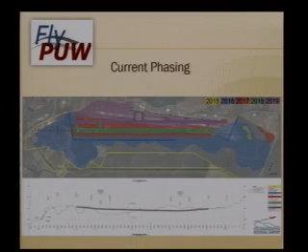The construction, we started that, and a lot of the pictures have to do with what is going on with that particular endeavor. So to kind of show what's going on, 2015, you can see the yellow line that goes around—that's the power line, is this piece here. And then we're really talking about this work right here is really what you're going to see. 2016 shows that there's going to be a lot more work to the east side, and that just did not—there's some work that happened over here, but not all the way down.

In 2017, we're really looking at trying to get the remainder of this work done, and then this work will be bid. They're both about the similar size.

I'm hoping this works and that we actually got sound, but this is a typical day when they started on the project, and it kind of shows what happens with scrapers. What you're going to see before I click the video on is dozers pushing scrapers to try to get earthwork up, because the clay soils underneath are heavy. It's heavy, it's hard to push, and it's amazing the amount of horsepower that goes into this.

At this point, there were about 40 pieces of equipment on 60 acres, flying around. Those dump trucks are doing about 65 miles an hour. It's just amazing, it looks like a giant pig pen flying down the landscape. I sat out through this summer several different times, and it looked like a NASCAR race with a bunch of great big earth scrapers. These tires were taller than I am standing up.

These guys, and Tony's not exaggerating, they're clipping along at a fast, in my view, scary pace. It's a good thing I'm not driving one of those things, I tell you.

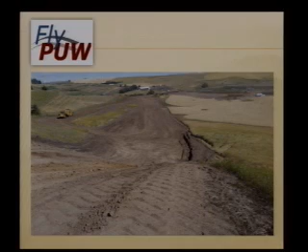Ironically, it could be donated as a road, but the FAA doesn't allow you to accept donated things for restricted purposes, so we are purchasing it, and we're using it as a road so they don't inadvertently destroy Highway 270. But the groundbreaking, if anybody was familiar with the groundbreaking on this project, was actually right here.

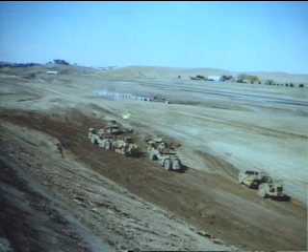This gives an idea of the cut and the angle of the cut when you look at how they did this piece, and then how much equipment is moving, and then you can see the box culvert down here at the end, and we'll show some pretty neat pictures.

We basically had to pipe Airport Creek, which runs through the airport currently. It comes in the east side and goes out the west side, and that's got to be put in a box. That's a pretty neat endeavor where they had to go down to bedrock, and there's some really cool pictures of how they put that into place.

This is just them working, but it's a fun story. Anytime you do a big earthwork project, especially around here, where you're going to do 60, 70, 80, 90 feet of fill, things are going to compact. They're going to settle with time.

Strata, which is local, is the geotechnical engineering company on this project. They had to put $30,000 worth of sensors in the ground, so you'd know how many feet or inches of compaction you have over time, and how much deflection you have, because you're raising the earthwork up as you go.

So they put these sensors in the ground, and then we had to figure out, okay, if a scraper goes by, or one of those dump trucks going 65 miles an hour hits one of those sensors, we're going to have to dig them all up and spend another $30,000. So how do you prevent that?

One thing we figured out was scraper operators won't hit the national standard flags, which delineate where those instruments are. You can see the flag way down here—they're looking at it from a haul road, but you can see it from quite a ways away, so they stayed away from it.

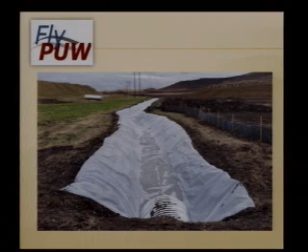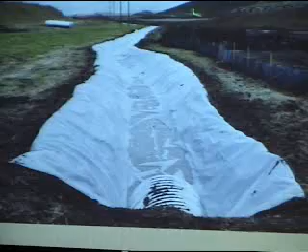This is Airport Creek, and we had to build a separate alignment for it. They plasticized it up and built a separate alignment to temporarily reroute the creek so they could start putting culvert in. You can see equipment staged up at the top, starting to do lifts.

They went through here with a cat that had basically a big claw on the back of it to rake up how hard the clay was, so they could get it moved and get a scraper to use it. You can see it's kind of rubbleized—it looks like a bunch of rock, but it's not rock, it's just really, really hard clay.

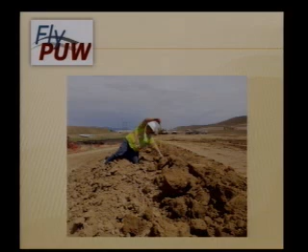They do everything in lifts because you have to compact it. One of the things that's really difficult about the soil around the airport and in the Palouse in general is there's a lot of water in it, and water does not percolate down through the soil—it just sits there. To get compaction to where the engineer says it has to be, you lay the earthwork out in a big thin sheet, about 4 inches at a time, and then pack it down. They do that over and over again.

If you're doing 4 inches at a time over 20 acres, it takes a while to move that much earthwork. If you've been out there recently and seen how tall some of that is, that's 4 inches at a time for that many acres. It's pretty amazing.

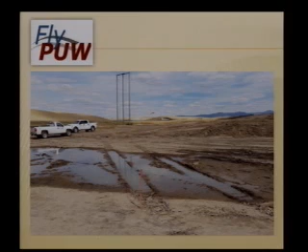This is the water—they opened up the topsoil, got down to clay, and all of a sudden we had a spring. It happened immediately; there's standing water anywhere you get close to bedrock. Because of how the Palouse was formed, with the Lake Missoula floods and those kinds of things, you get basalt, and if you go to the channeled scablands it looks like a big canyon that filled in with silt. So in some places bedrock is 6 inches away, and in others it could be 600 feet. Water tends to spring up in odd locations from time to time, and we found a lot of that with this project.

So how do you get rid of the water? You've got to get a certain amount out. This is a farm tractor with a disc, and they're disking that soil so it can get compacted, so the scrapers can run over it and it'll actually dry out enough to get the compaction. They do this for each 4-inch lift.

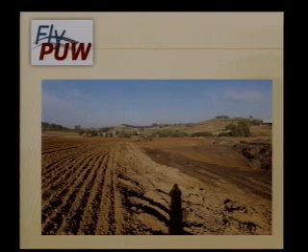This is the scraper. You can see, kind of like what you saw in the video, they've got a big belly dump in here, and the earthwork is spilling out of it. The amount of torque they have to use to push one of those is just unreal. And when you use a lot of torque and push a lot of weight, things like that happen. So this one blew a tire.

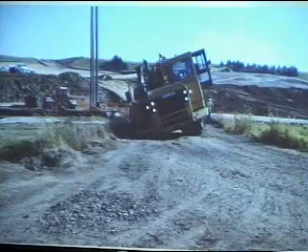Like Bill said, the tire is taller than you are, and it costs $12,500 a piece. They blew three in a week, the first week, trying to move earth. It's just an amazing thing to watch. The maintenance crews were running 12-hour days, and then mechanics worked the other 12 hours just to make sure everything's up and moving for the next day.

This is the box culvert. They came two to a truck, and so far we've placed 365 sections. There were 182 trucks that came from Salt Lake City with box culvert on them. So we saw a lot coming through, in and out, to get that placed.

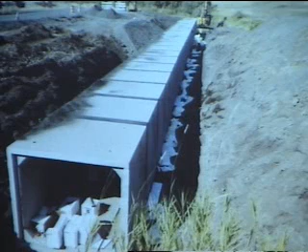And here's the box going in. They started it up, and it's basically like a fit-together toy, as they keep sliding pieces in and then seal them up. And the tolerances—well, there's a picture of the tolerances, but they're extremely close.

You've got to set it just right, because if it's backwards, the water doesn't flow the right way. And if it's tipped too far, then you have too much coming out, and you end up eroding everything downstream. So there's a lot of engineering that went into just designing this and getting it to where you could put water through it.

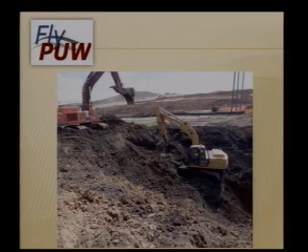So they're digging down to get the box culvert in. They've got to get to bedrock, because water sits here and then you've got bedrock. If you design the box culvert where it should go and don't fill that up with rock, you've got water hitting bedrock, going underneath it, and eroding your box. So the box starts to fall, and over time you end up in a big problem.

So they had to go dig, and this kind of shows how far they had to dig. You've got one excavator digging down and dropping, and then another excavator picking up from there and dropping. These excavator buckets are I think 35 or 40 feet, so they're going down quite a ways. And again, water—here they're hitting bedrock, and you start seeing the groundwater seep into the project.

But they're loading trucks—you can see that's a big dump truck. I can't remember how many cubic yards those hold, but the tires are taller than I am. You can see how much material is going into there.

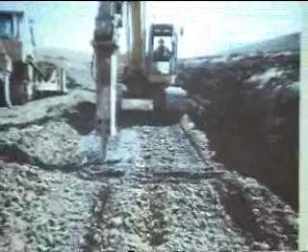This is drilling, and they drilled because they needed to blast. We got to the point where the bedrock got really close, so you've got this piece of bedrock that sits up here and then drops off. They had to get rid of it, so they drilled—I don't remember how many holes, but it was thousands—and set charges over two separate days to blast that out so they could get the rock out.

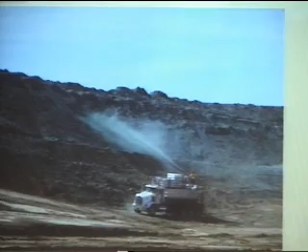This is hydroseeding. They had to do hydroseeding quite a lot, because you've got to keep the material from eroding and ending up in the creek. Otherwise you have an ecological nightmare because you've stopped up everything downstream in the creek from not controlling the runoff. So there's a lot—it's millions of gallons of hydroseed that they put in, I'm pretty sure. It wasn't a little bit, and a lot of hydroseeding had to take place over time.

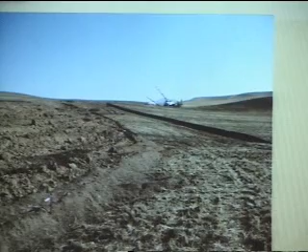This is Michael's—this is a power line going up. So we took the existing power line and moved it. So one going up, and here's one—this gives you an idea. Paul, correct me if I'm wrong, but I believe these are 35-foot or 40-foot power poles in here. So this is 40 feet.

This is an island of earth all by itself—everything else is removed. The existing power line was here, and the contractor had to work around that until we could switch the power lines over, and there was a lot of work to get that done. That power line sat on its own out on that island until two weeks ago, when it was finally taken down once they were able to switch the alignments.

Before you go on, you might want to mention how the distance, because where that power line is set up, and that 30 feet, they went quite a distance that had to be dug out. I have no idea how many feet to the west or east that went, but it was quite a distance. They had to be guy-wired away.

So it was, I think, 250 feet outside of this when they got to the base, and they just built it up like that, and it sat on its own. It's just one big earth island that they just kept digging around.

This shows just from a long ways away, they're still farming. Here's the disc, and here's the tractor, and they're working this entire thing back and forth with the disc, trying to dry it out. This was August time frame.

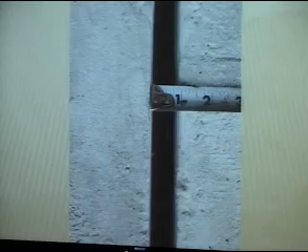We start seeing water show up in the box itself, and we get into October, which everybody that I've talked to that's been here with any length of time says is the wettest on record that anybody's ever seen, with how many rain days we actually had. So that got to be problematic.

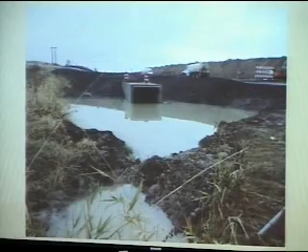It's hard to do work and get to bedrock when you've got to pump all the water out. You can't just pump the water out and pump it into the stream. You've got to pump it into a truck and filter it out. It's not a simple just move the water over here and set it back in the channel. It doesn't work that way.

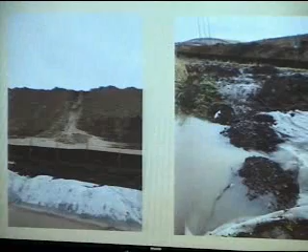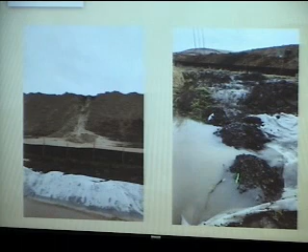This is runoff, this is from October. So you've got erosion fencing and that temporary creek settlement they've got in here, and it's already starting to silt in because there's so much water, it has nowhere to go. The ground is completely saturated, it has to go somewhere.

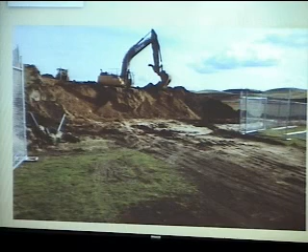This is a building for Washington State University to relocate a building that was underneath the power line. Nobody wants to work underneath the transmission line, and Avista doesn't want you working underneath it either. So we had to order a temporary office building, temporary meaning a couple of years probably, for those people to move into a different office facility, with the permanent facility to be removed in the spring. That was a large coordination between the airport, Avista, and Washington State University.

This is Airport Creek from the east going around Airport Road, and it just shows the creek full. This gets to the point where it floods. There are hangars you can't see over here, but it actually will flood over the hangars when it hits flood stage, which is why that 6'8" box culvert is sized the way it is — it has to handle all the flows coming off all of these hills and what comes through the existing creek alignment.

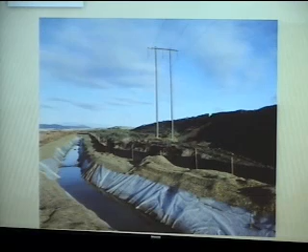So the temporary—they're running through, and then you start seeing, so you get the temporary here, and then you've got power lines, and you start seeing how high this is getting. This was down where the power line is, and now it's starting to build.

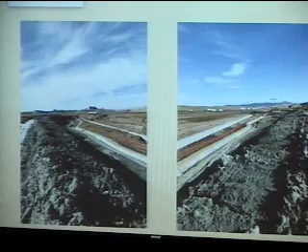So you put the box culvert in, and you can't, like we stated before, just dump the creek back in. You've got to slow everything down, and then you've got to figure out how do you keep fish and things like that out of it?

They did a count to see if there were fish in Airport Creek, and the Army Corps of Engineers came down and they flushed it, and they've got a net down at the end, and they caught 3 frogs. No fish.

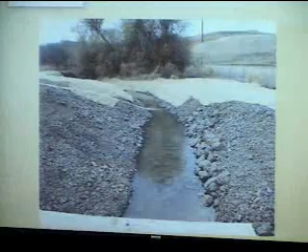But this is the creek when they finished it. You can see the water's quite a bit clearer, and there's boulders in there now. And then they've got wrap here to keep erosion down and allow vegetation to grow back in.

And so you can see the wrap pretty well from this standpoint. That's just basically woven straw, weed-free straw, and then they can seed this and it'll grow back. But this is the outfall.

It steps things up and allows the water to exit but not end up going back. It makes it harder for fish, if any, are in the creek. You do see fish in Pullman, so conceivably they can get up there. We didn't see any when the Army Corps was out, but it's a pretty neat piece of cast material.

This was down to 1/8 of an inch. So they're working in water, trying to place concrete exactly 1/8 of an inch with big pieces of machinery, because you can't do that by hand, you have to do it with machinery. It takes unbelievably good operators, and this took about 3 days just to place this correctly.

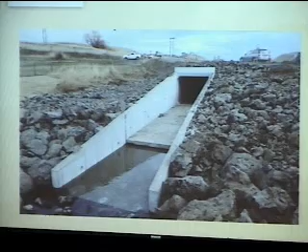This shows you the box. So here's the box, and this is going east, and you can see the bend, and it starts to take off. So it's a pretty massive structure.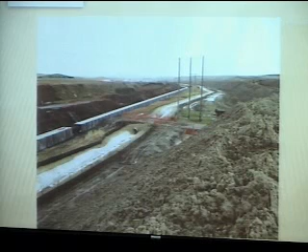And then where we're standing, where you're looking at this picture from, it was this level to begin with. So you're standing on probably, at this point, 40 feet of fill material.

The road they paved, they had this all dug up, and everybody that took Airport Road to go to the Pullman back way, this was dug up for quite a while, a couple of months, and they were trying to put the box through this way. They finally got that repaved before winter hit, and they're in a winter shutdown now.

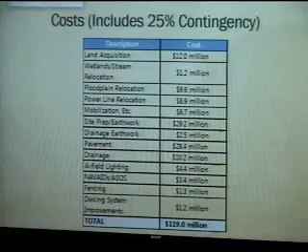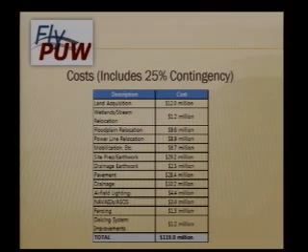The costs where we're looking at: land acquisition, stream relocations, floodplain, the power line, mobilization, site prep, drainage, pavements, more drainage, drainage earthwork, and then the actual piping you need. The lighting, navigational aids, weather station, fencing, there's a whole bunch of things that go in, but it rolls up into a total cost with contingency of $119 million.

Economic impacts are pretty important when you're looking at a project like this. Currently, the airport by itself is 212 direct jobs. The construction is 93 direct jobs every year for 5 years. There's 226 total jobs created because of the indirect effect, and it contributes $20.1 million to our gross regional product. $3 million is in local and state tax coffers annually.

There is a split with that. Yes, the project's in Washington, and there are taxes that go to the state of Washington, based on sales tax for each project. Washington taxes the project, but then you've got all the other things. If they've got to buy a tire and they have to come over to Pate Machinery to buy the tire, that's $12,500 they're spending in the state of Idaho.

So there is a difference in how money gets spent, because a lot of the larger ag businesses aren't in Pullman, they're actually located in Moscow. But to give an idea of what you kind of saw from the construction, there's growth.

And our enplanement was people getting on a plane. There were 20,000, or 20% growth in 2014 to 15. 2014 was 41,525, 2015 was 50,883 - it's the first time we'd ever broke 50. I've got a report from October 31st, to 2016, and the enplanement for 2016 is 49,562. We've got 2 months to go, so we're going to shatter probably 60,000 this year. That's 20% growth 3 years in a row.